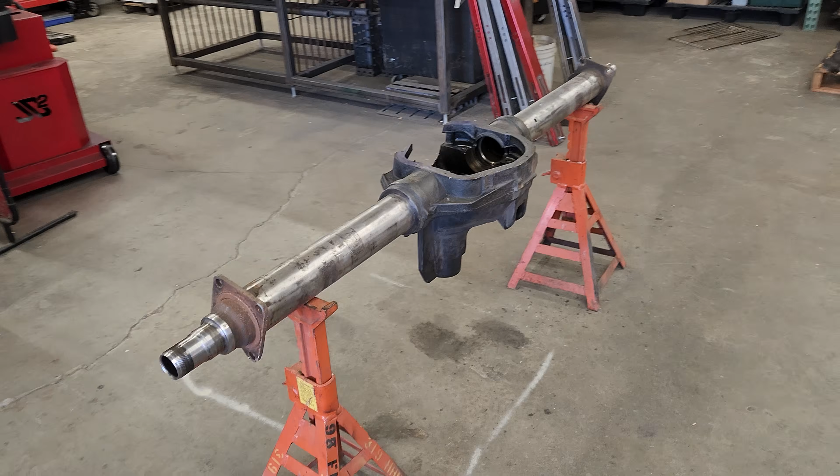It is time. Today, we are going to prep the axles for welding. So this is what we're looking at here on the Sterling. It's been machined, but it needs to be cleaned up.

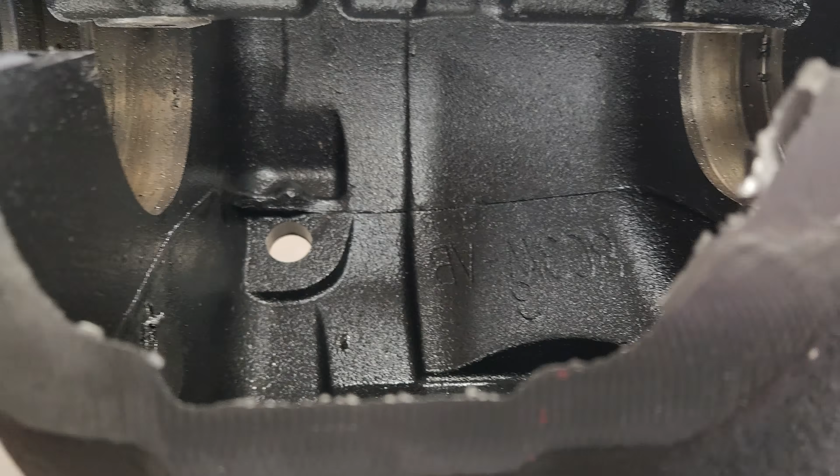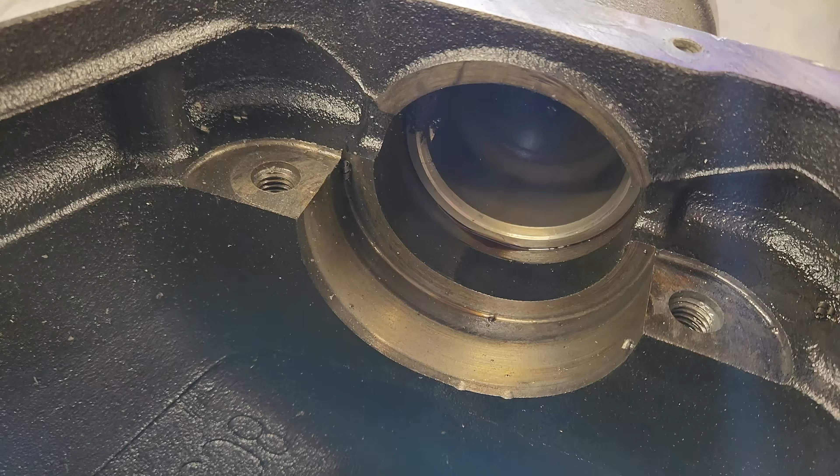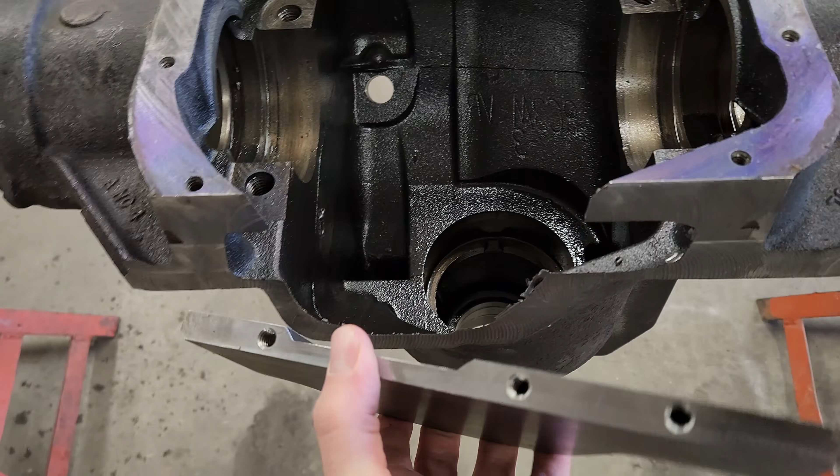We'll use a sanding disc on an angle grinder and clean all this oil out, all the bushings and seals and rubber, everything has been removed from this axle. So we'll get this cleaned up. We'll have our Ballistic Fab 1/2-inch thick plates welded on. They take out a decent amount right here for the ring gear that gets turned down, but then there's also another plate, an AR 500 plate that gets welded on top of this to add thickness. So that's important, and we're going to do that. See how much more clearance you get out of that? Let's get started.

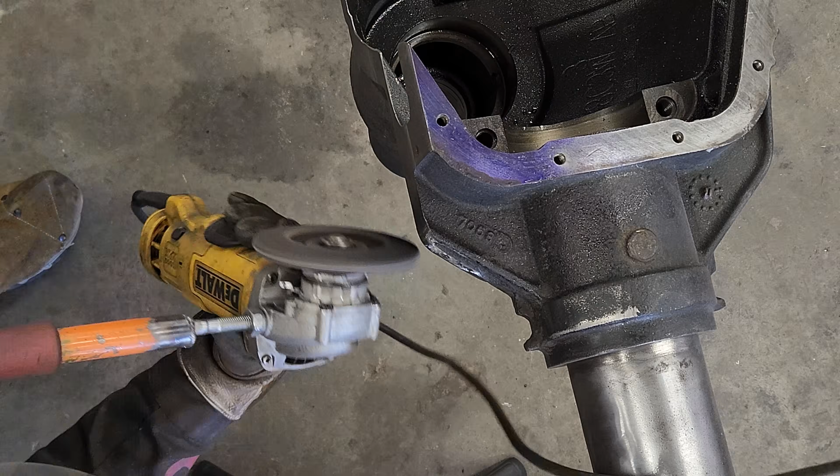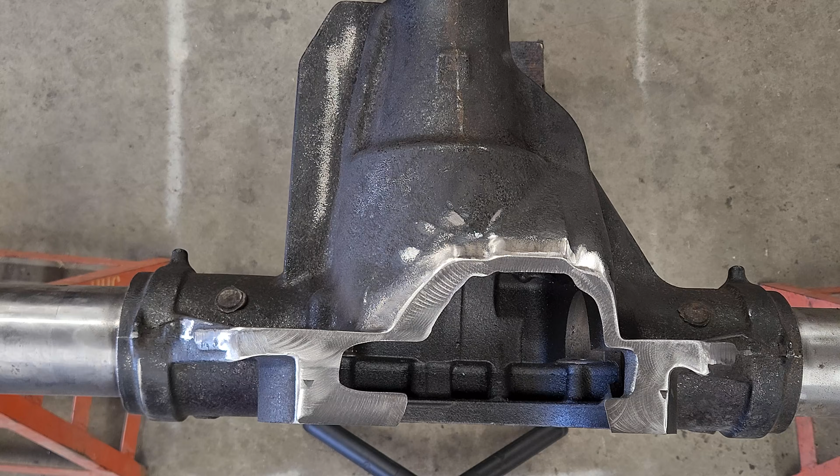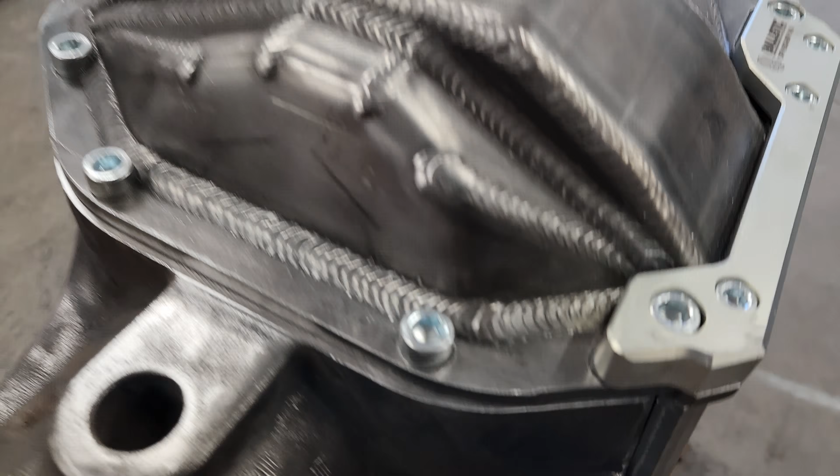Now, this is the before, and after you bolt everything up, this is the after. So I've got the cover adjusted in all positions here to where it's about in the center of the cover. The bolt holes, because you don't want to have pushed up one way or the other and have the bolts difficult to remove and ruining the threads every time. But you get that all lined up, and then you get this pressed up against it, and this thing is ready to weld.

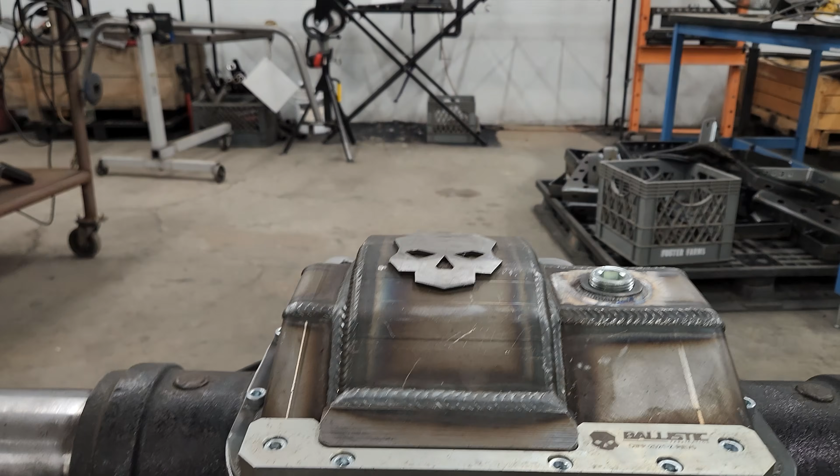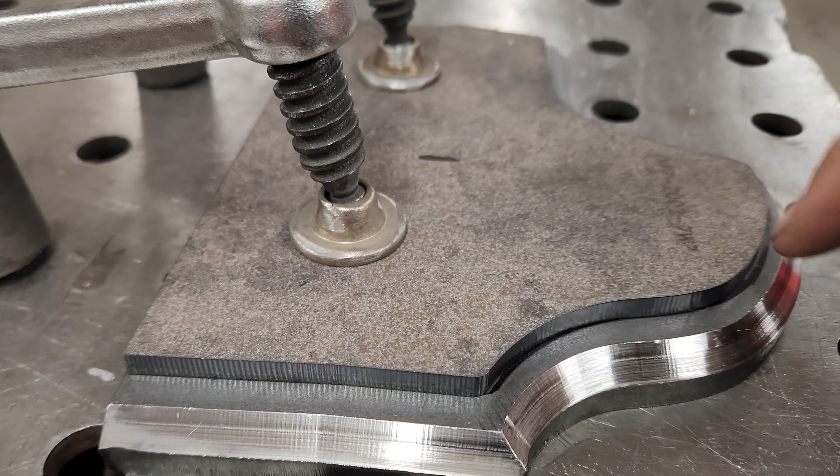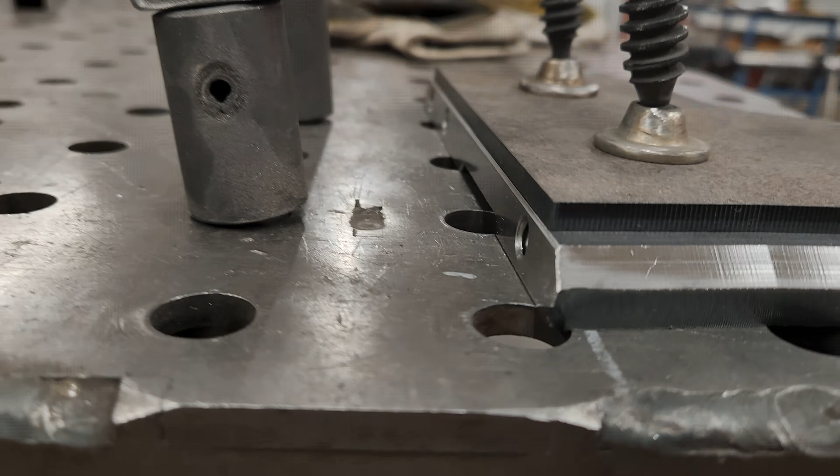One thing I would like to mention is on the Sterling axle here, the plate that gets welded in on the bottom is flush with the diff cover. The Superduty 60 is not until you weld on this extra armor plate that they provide for you. And if you look down, you'll see that everything's even all the way around. What I did here is instead of putting it just exactly flush with that, I set it back right to the edge of the chamfer all the way down. So a little bit of standoff. I'm going to weld this everywhere except all of that.

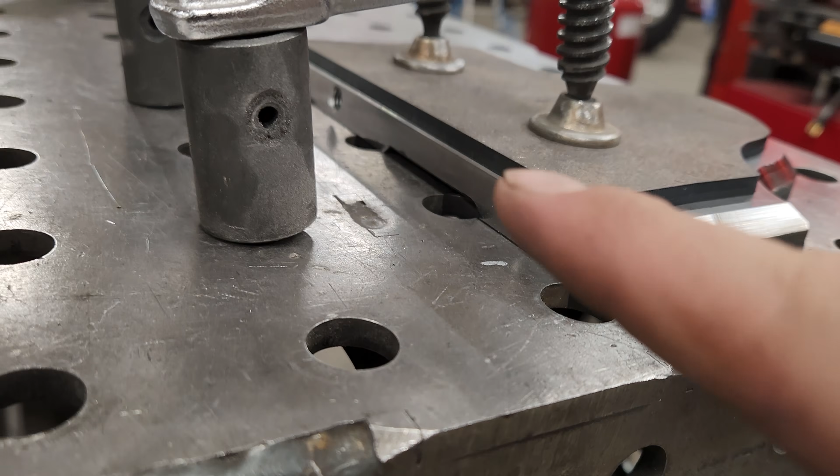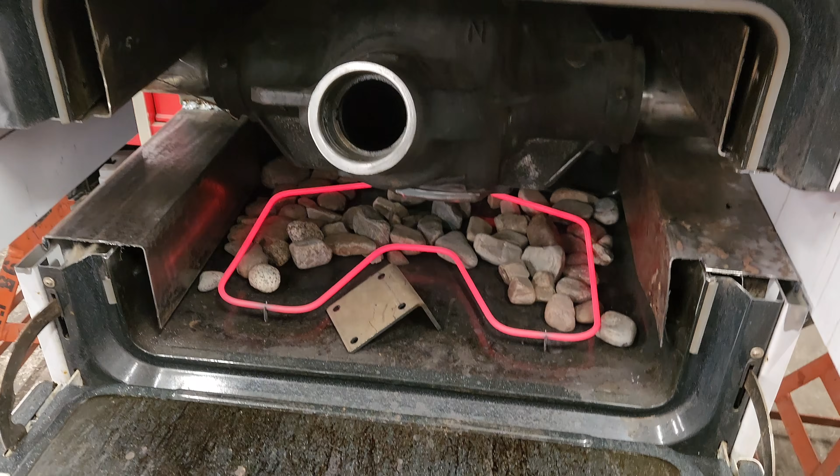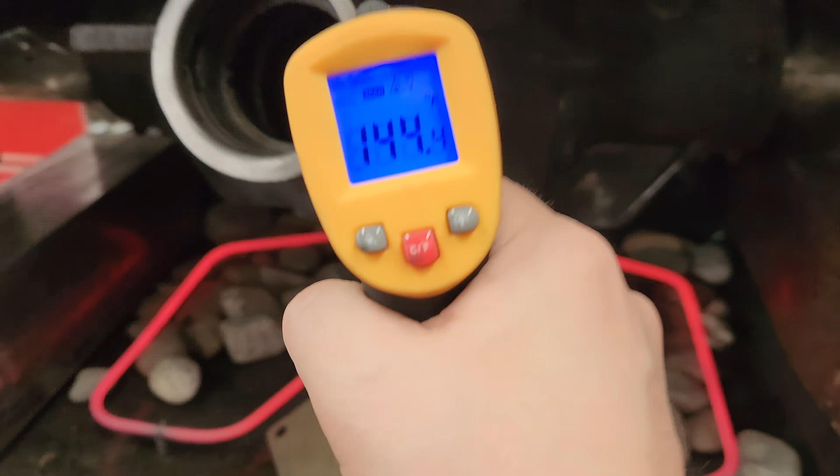And so now we need to get the oven warmed up so we can bake the axles. For the time being, we will use the infrared thermometer. Currently, let's check inside here. We've got the back of the diff cover, got about 144. Outside here, 165. It's going to be warmer down here.

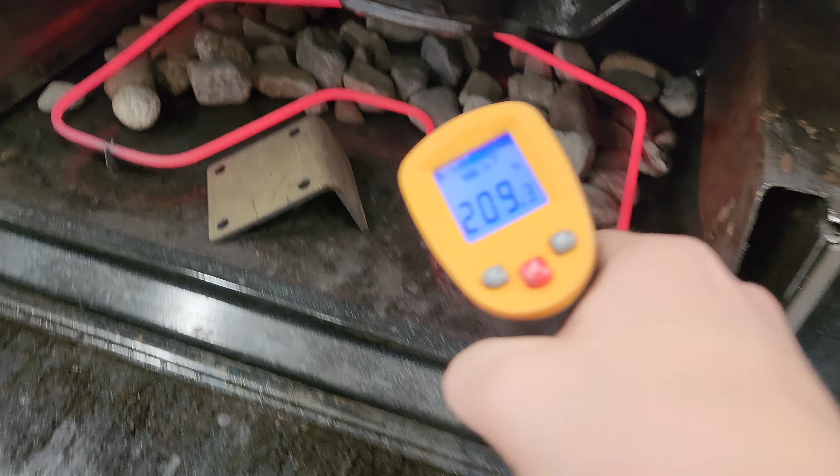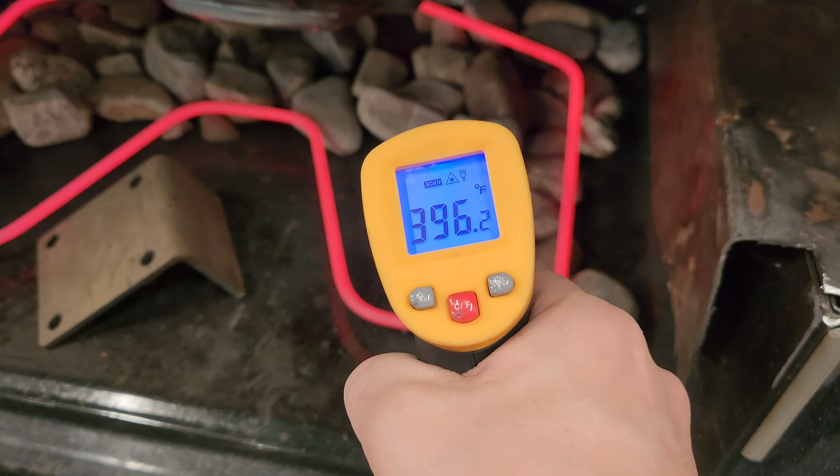About 209, and of course the heating element's going to be 700 to 800 degrees. Ooh, I saw 666 in there. Yeah, so the rocks are about 400 degrees. It's nice that they're not exploding. If you have ever tried welding cast, you'll hear a little ting, ting, ting. That is not a good sound.

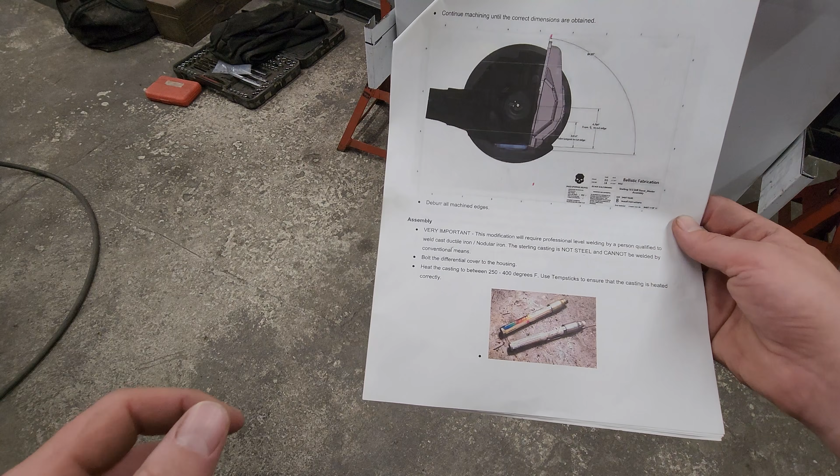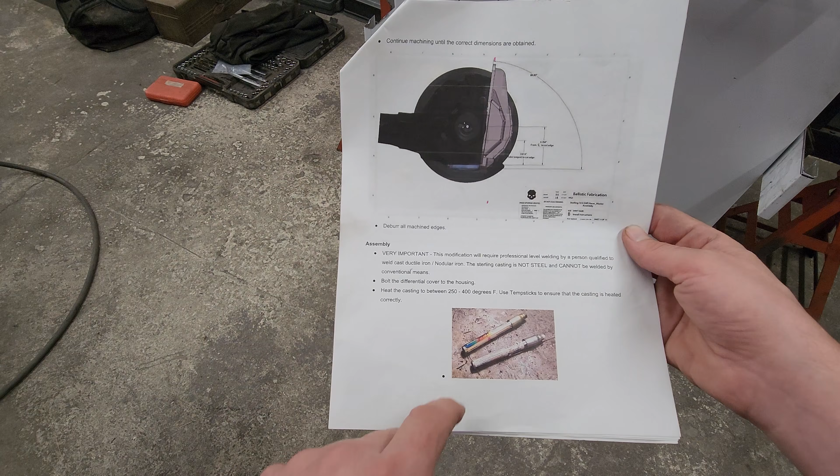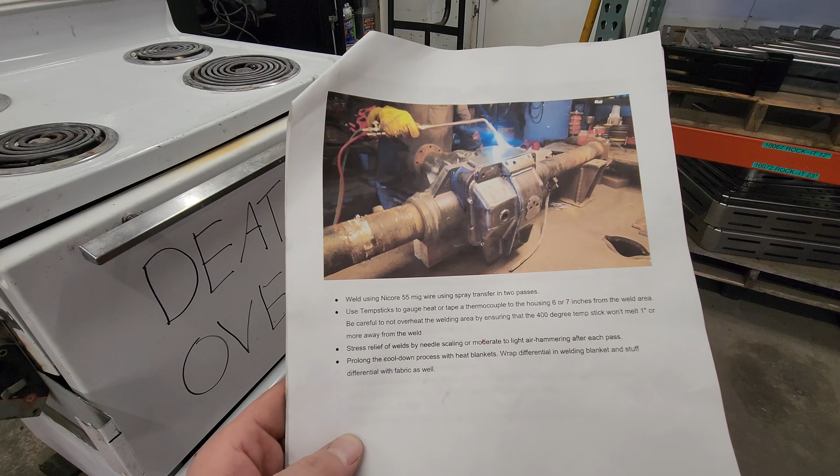So what you need to do, bolt the differential cover to the housing, which we've done. Heat the casting between 250 and 400. We have ours set to 400, but the casting, I believe, is going to sit around 300, 350 degrees. Knowing we don't want the axle housing to go over 400 degrees, we will limit our welding time and make sure that with the infrared, we're not going much above that at all.

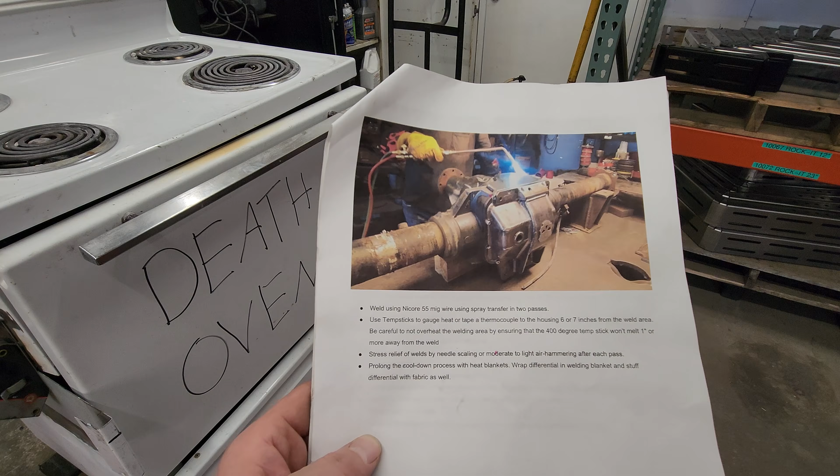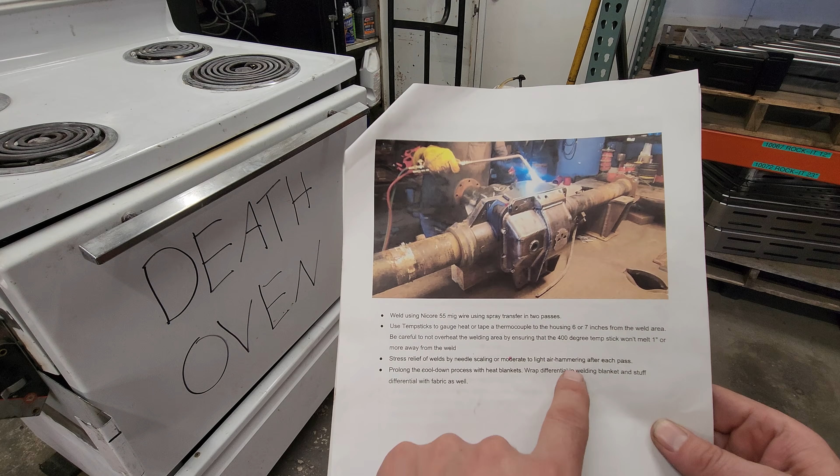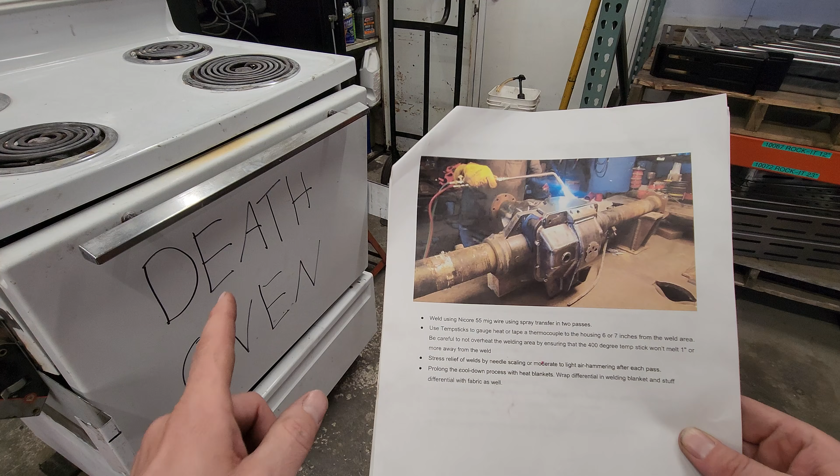From there, we will go ahead and stress relieve the welds by needle scaling or moderate to light air hammering, and we will end up using our needle scaler. So an air-powered tool is going to be really nice and easy. We'll weld a little bit, put it in the oven, weld a little bit, put it in the oven, finish welding, and then we'll control the cooling over a number of hours.

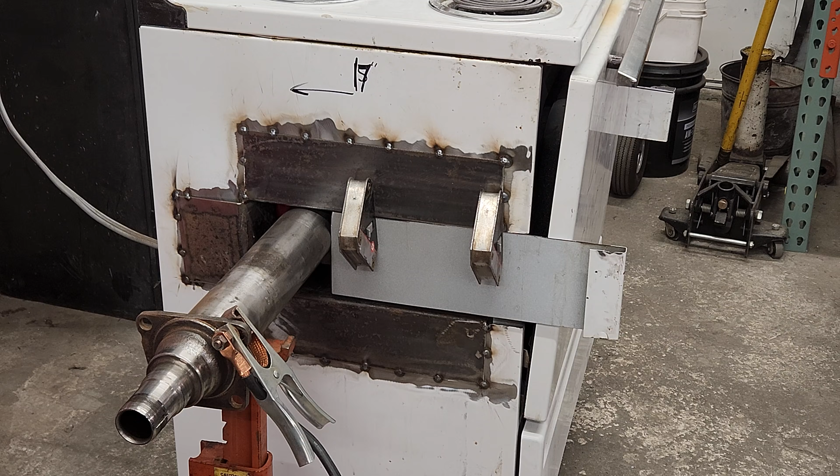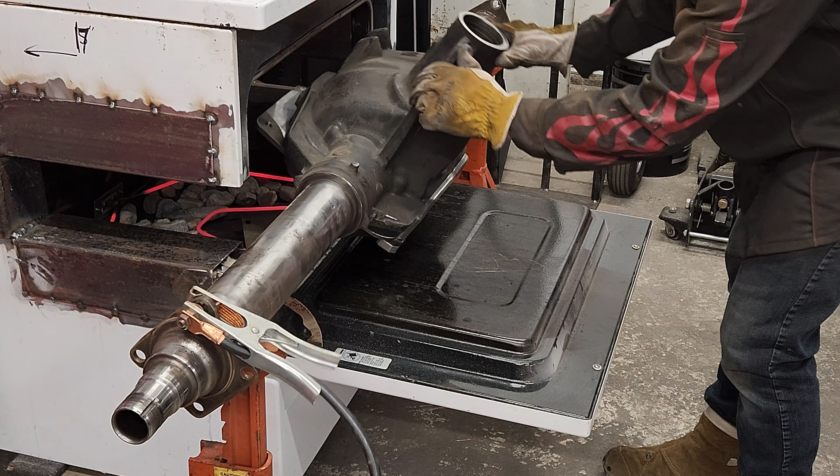We now have everything set up. We have the air hammer, we have the welder set up, we have the axle at operating welding temperature, and we are ready to go. I'm going to pull the axle out of the oven. Oh yeah. Certainly welds a lot different.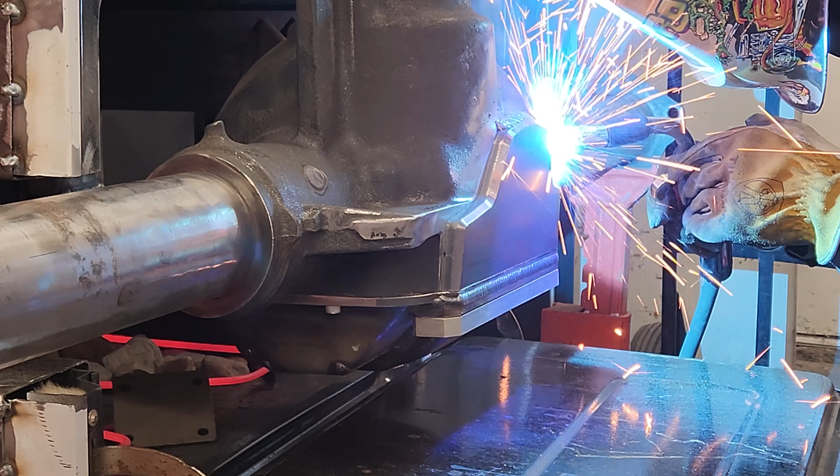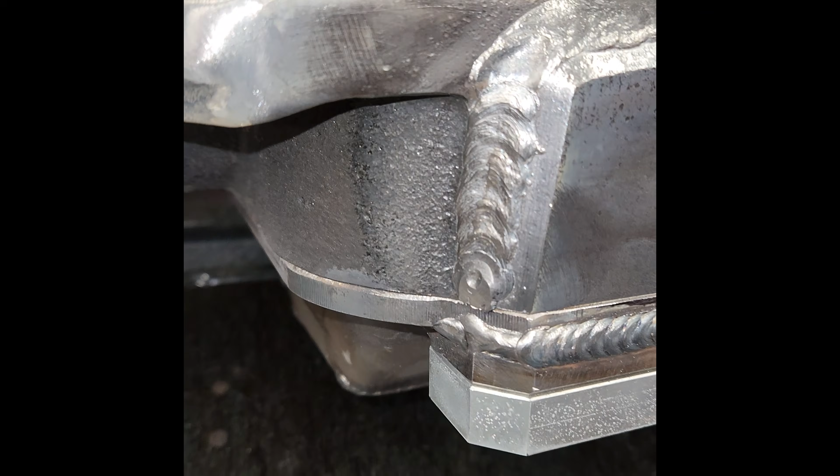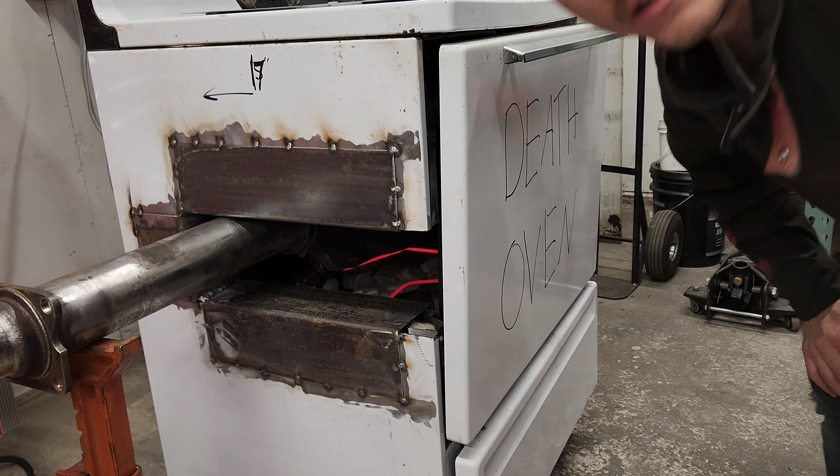That looks pretty solid. Freshly baked axles with the shave kits. Oh yeah. Now we control our cooling 50 degrees at a time.

Regardless if the instructions tell you to or not, Ballistic Fab does recommend welding the inside as well. Make sure you do that. Next, we're also going to weld the tubes to the housings.

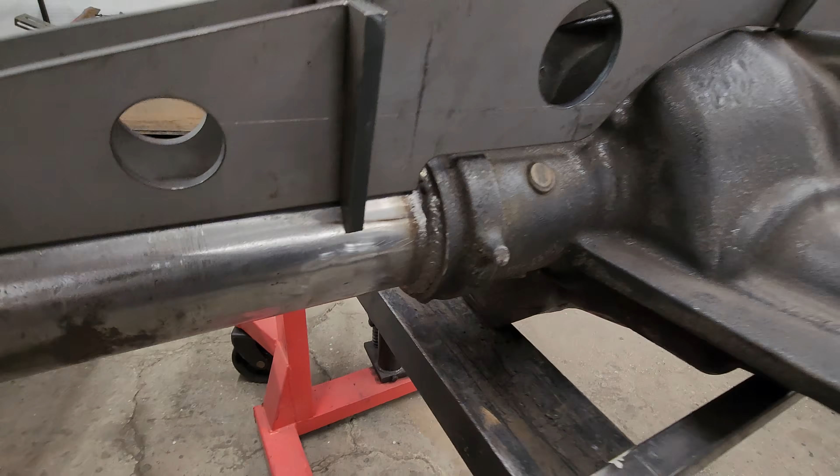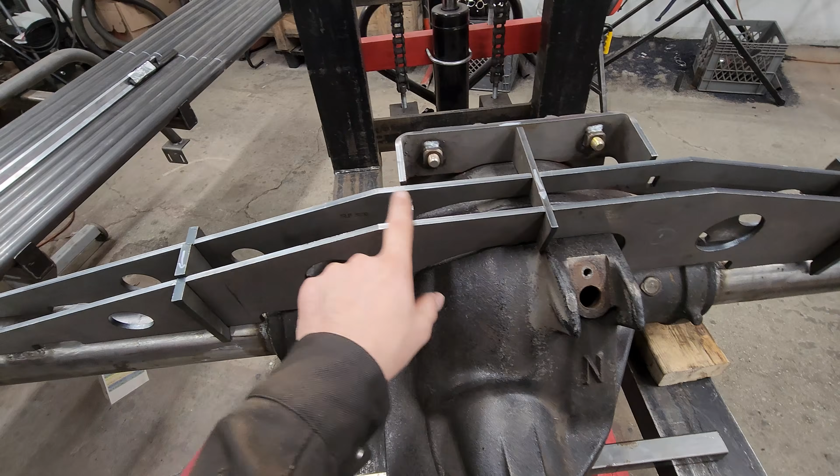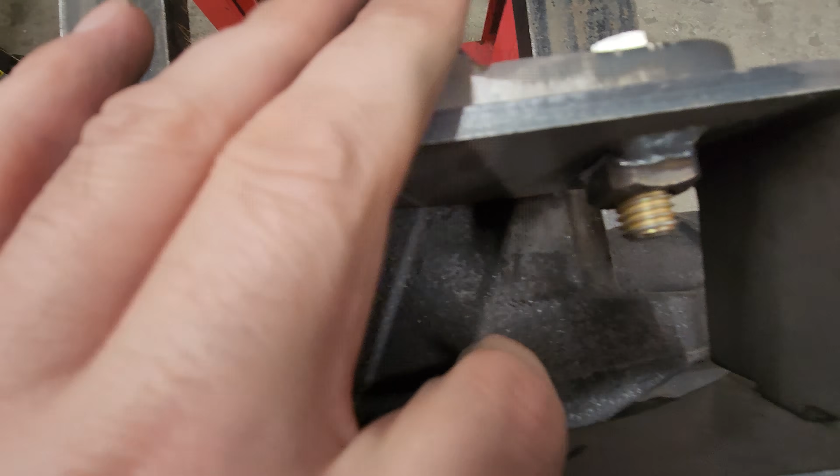Axle truss time. So we've got the inside and outside of the shave kit done, and then we've welded the axle tubes to the housing. And on the Sterling axle here, the truss is very, very simple. You got two pieces that span side to side. You have this joint piece, which looks like a big M, and then you've got this piece in the middle that connects all that. This piece bolts to the differential cover, and there's a couple of tabs that go right in here. So I'll play with that, but after that, this next piece goes on.

Doing this one-handed, there we go. So that would be the complete setup. Looks like I need a little aligning action done, but it sits pretty good. I just have to get a clamp. Looks like a clamp on both sides. It's steel, it's flexible. It's not exactly perfect right out of the box, but it doesn't need to be.

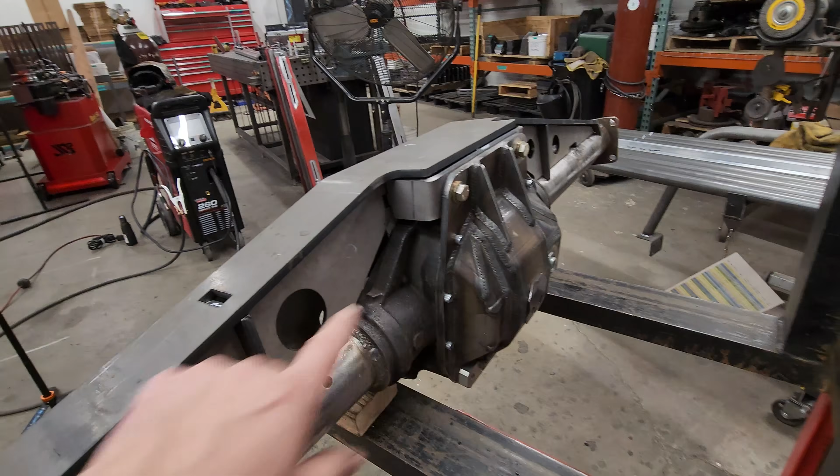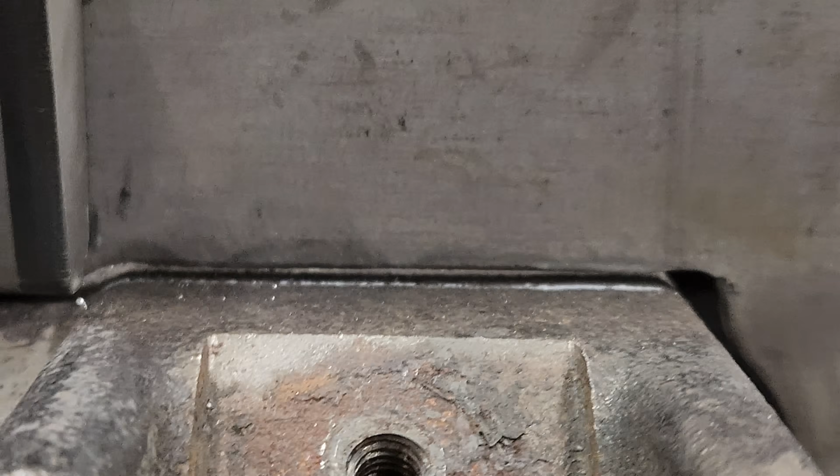So we will go ahead and clamp those down, tack weld everything, pull it off, weld it together, and then weld it to the axle. As you can see, it didn't take much. Maybe about 3/16 of an inch. Less than that probably.

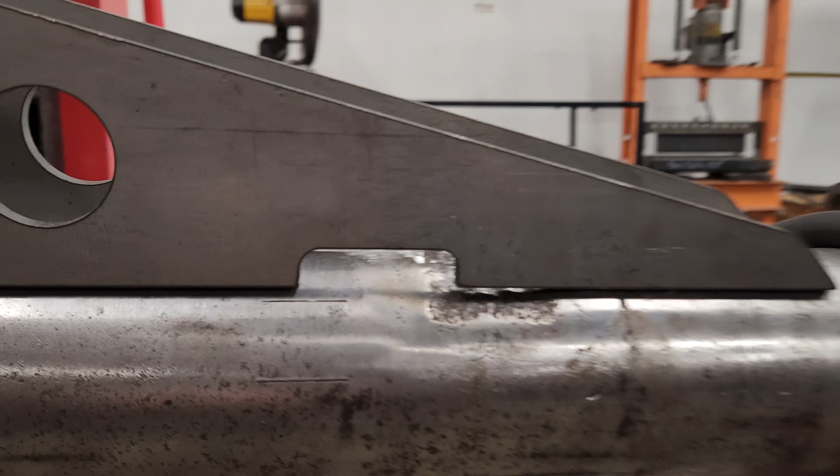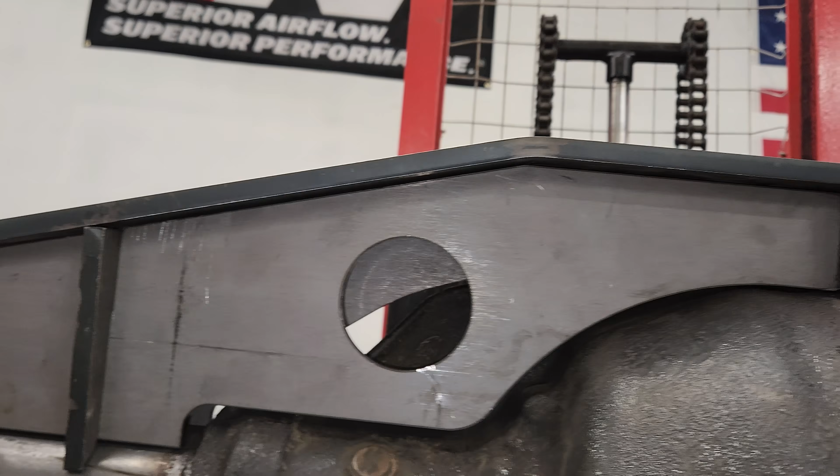But that looks a lot better. This is where the spring perch was, so there's some material missing. But that'll get filled in with weld. That looks a lot better. All the crevices, the gaps that we need to weld, they are all tight. Tighter than a frog's ass. We're ready to tack weld this thing.

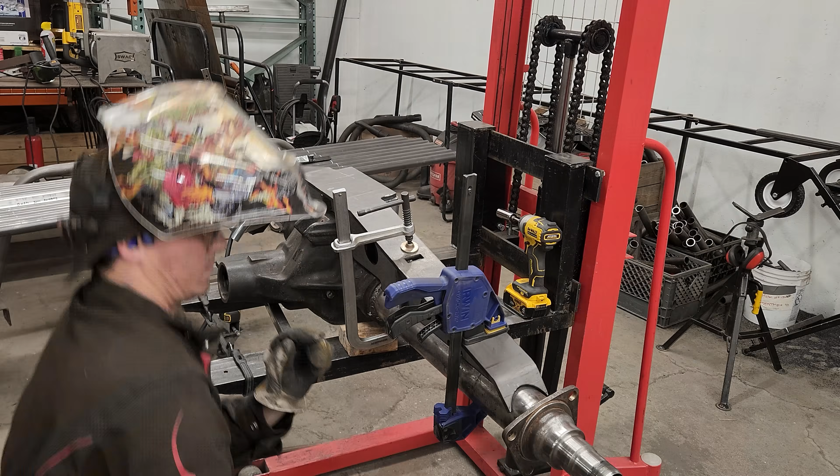Now that we have the truss all welded up, let's weld it to the axle.

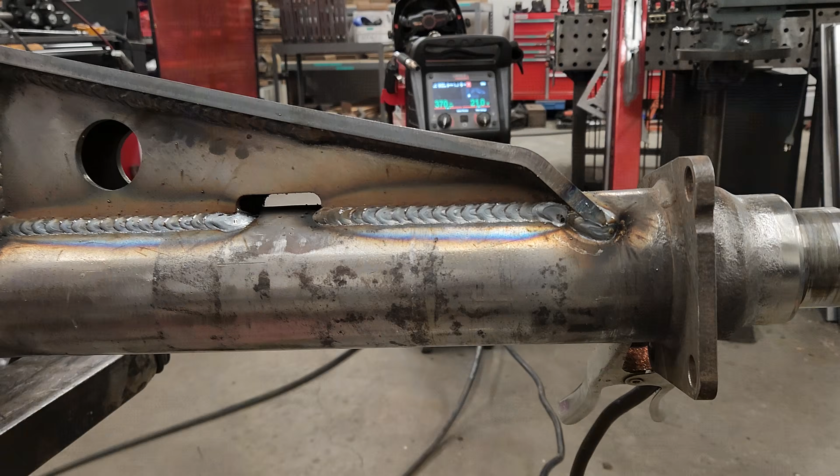After a little bit of cleaning up the welds here and making sure the interior of the differential is free from any spatter, we are heading off to the off-road kitchen to have the gear and spool set installed.